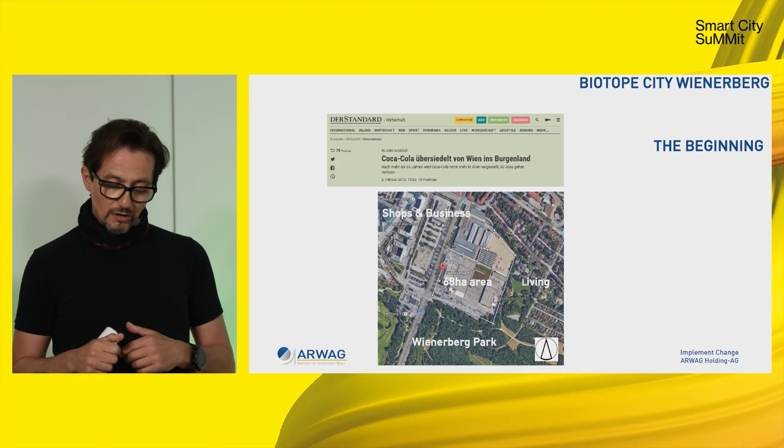The beginning. How did our story begin? It started with an article in an Austrian daily newspaper, The Standard, in February 2012, with the title, Coca-Cola is moving its production from Vienna to Burgenland. That's how the project was initiated. The existing property is fully developed and surrounded by single-family houses, offices and shops and parks.

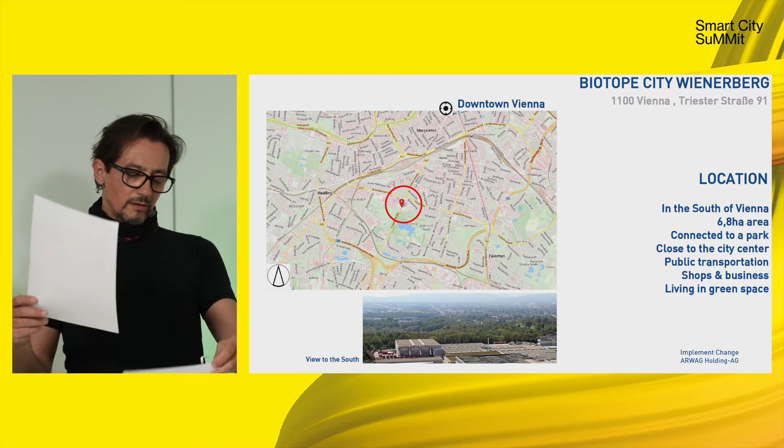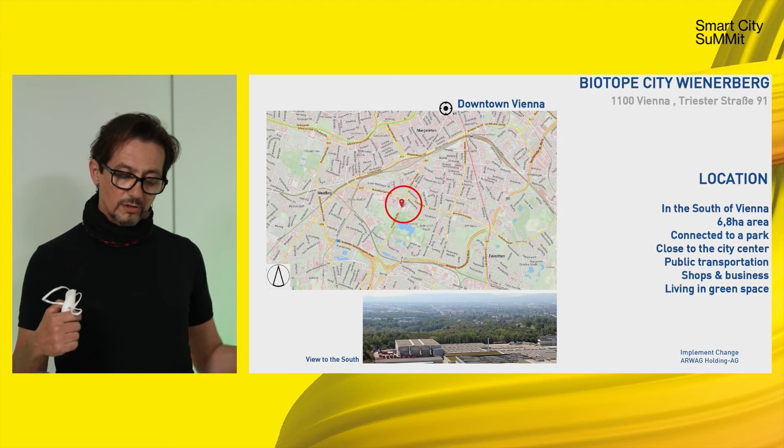The location. We are in the south of Vienna, in the 10th Vienna city district, under Triester Straße number 91. The location is quite densely populated and developed. The public transportation is already easily accessible, and soon a new underground network will further improve the accessibility to the public transportation. You can get to the Vienna State Opera in the city center by bike in only 15 minutes. We are talking here of a distance of 5 kilometers.

Office and shops are located vis-à-vis the location. In the northeast of the property, there is a residential area. The property is adjacent to the Wienerberg Park with a nature-preserved pond in the south and the west of the location.

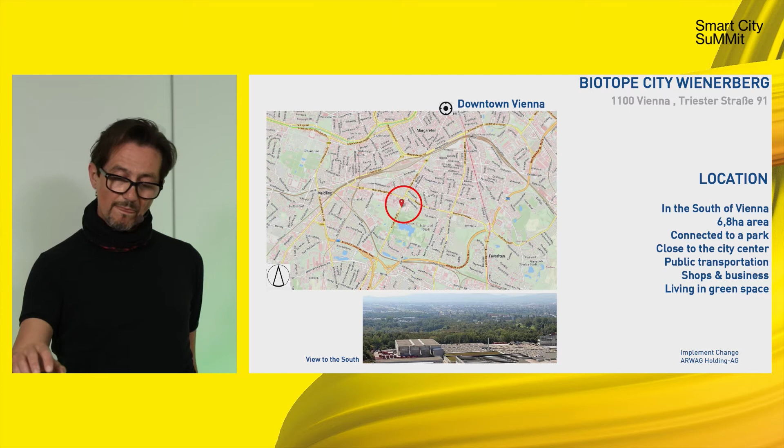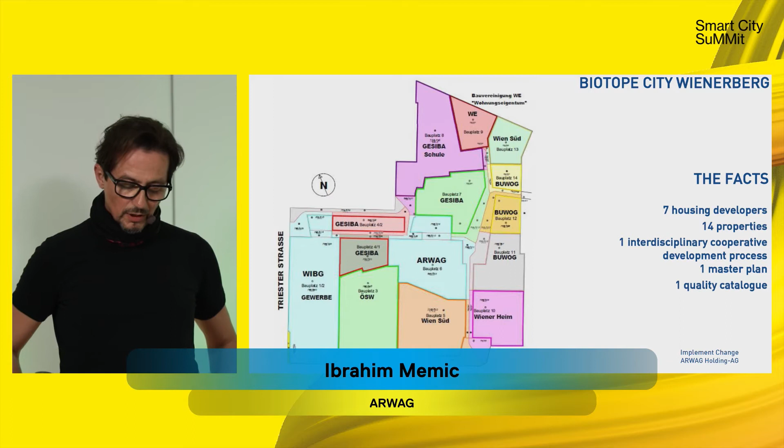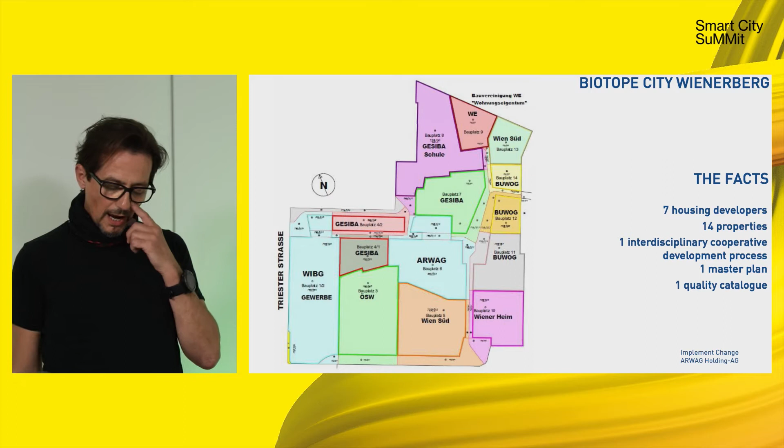The facts. The whole area spreads out over 6.8 hectares. 7 property developers cooperated on this project due to the size of the property. During the development process, the whole area was divided into 14 real estates. An interdisciplinary development process was initiated with the aim to develop a master plan and to define quality standards.

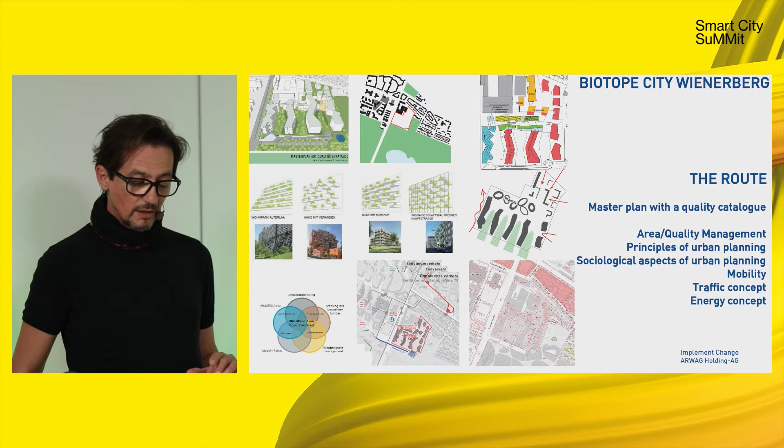The route. With joint forces, we developed a master plan for urban planning which is based on an interdisciplinary and cooperative process of project development. The procedure shows a perfect interaction between architects, developers of public spaces, urban developers, traffic planners, mobility planners, sociologists and energy developers, and focuses on area and quality management, sociological aspects of urban planning, mobility plan, public transportation, energy concept of Biotope City. The results are summed up in a quality catalog.

We didn't define what we do not want. On the contrary, we focused on what we want to achieve, and there are these aspects: living in the green spaces, green parks and connection to the nature, green facades, green rooftops, urban gardening, natural spaces for people and animals, car-free area.

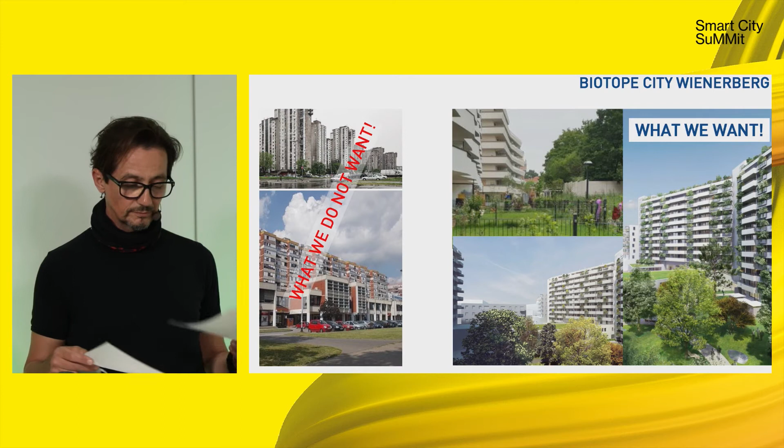What we did. What have we achieved? 1,000 apartments, 16% rental, 40% privately owned, 700 square meter commercial space, 14,000 square meter office, hotels and commercial, 1 school, 2 kindergartens, 1,250 car parking slots,

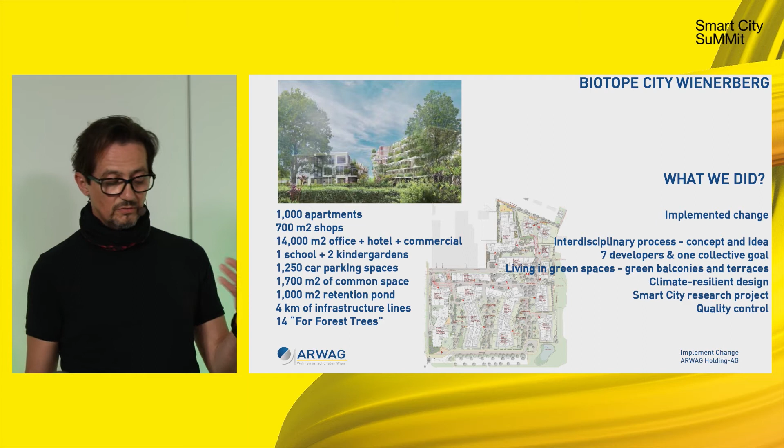1,700 square meter of common space, 1,000 square meter retention pond as a part of rainwater management, and at the same time as living space for versatile species. 4 kilometers of infrastructure lines and 14 forest trees. It's the same with 20 years as mature trees.

How did we achieve it? Let's call it implement changes. Thinking scientifically, environmentally friendly, and protecting the climate instead of improving old. By having a clear concept and ideas, by thinking as an interdisciplinary team, by following the same goal with other participating developers, by providing the green areas as part of the living space for people and the animals, by including climate-resilient design of the house on the landscape based on the scientific models, by behaving scientifically, by applying the traffic light system as a part of supporting quality control during the construction works. By following up on evaluation of the quality standards after moving into the building.

And how to implement change, or how do we apply the changes? Together with property developers who participated in this project, researchers, scientists, engineers, and most important of all, our willingness and knowledge how to improve climatic changes.

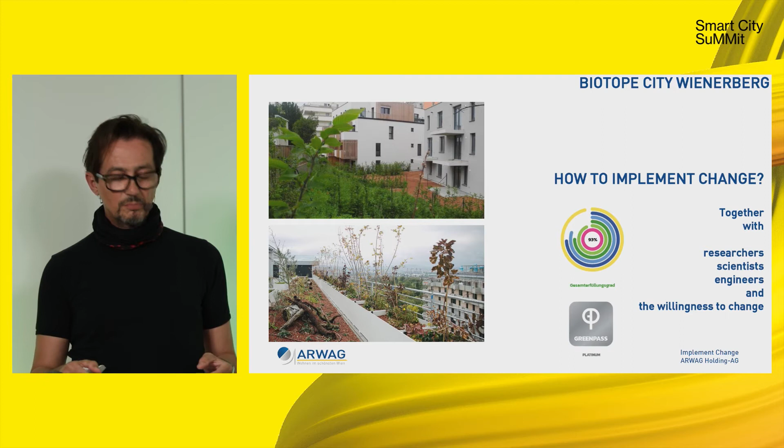Thank you for having the pleasure to introduce you to the Biotope City approach, scientific approach, how we can achieve climate resilient urban quarters, what we really need, and everyone I think is aware of. And we did this with a new tool called GREENPASS, and I will give you some insights on how we implemented that for the Biotope City.

So he initiated the project, found real estate developers that would support the idea, and finally we found the Coca-Cola area in the Triester on the Wienerberg in Vienna. And all started with a cooperative design process, as mentioned by Mr. Memic before, with different approaches how we could develop these 6.8 hectares.

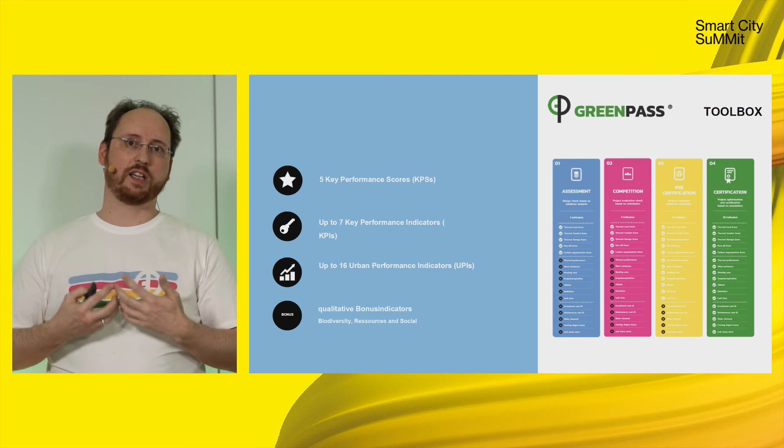And by that, it uses expert simulation tools and extracts and calculates from that 5 key performance scores, 7 key performance indicators, and 16 urban performance indicators from the results from the simulation combined with spatial analysis and some other things. And there are additionally 20 bonus indicators that also award points to a project.

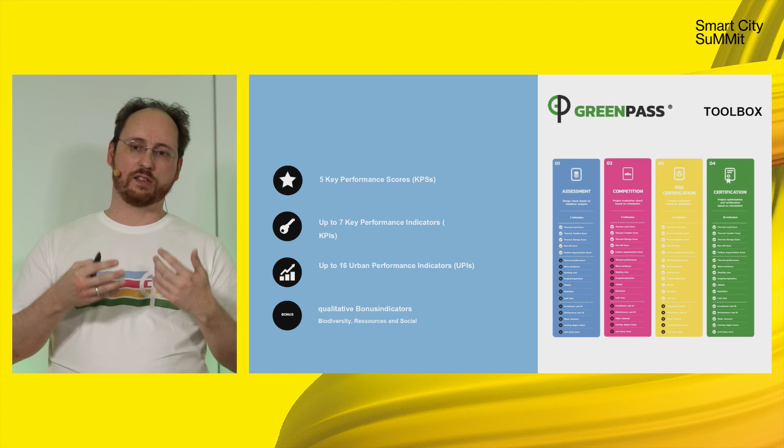The GREENPASS toolbox, that you can see on the right-hand side, is designed to really follow the principles of the development of urban areas from the preliminary design phase to the concept design phase to the detailed design phase, to really guarantee and secure the qualities over that long period of, it was 6 years now.

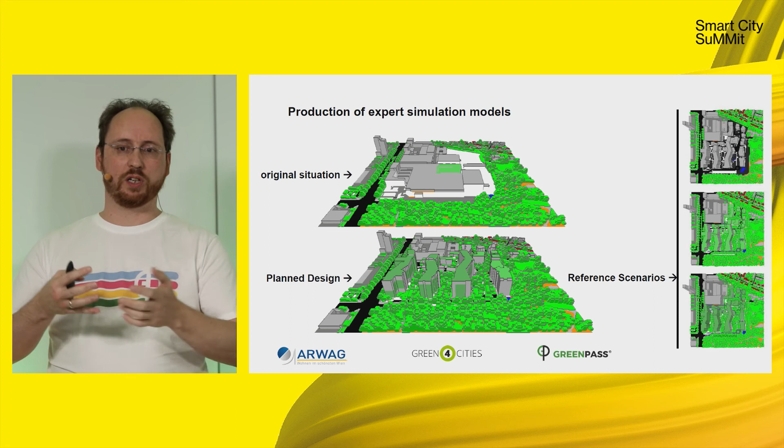Yes, here you can see the area again. Let's skip that. What we did basically is we transformed the architecture into simulation models. On the lower left, you can see the originally planned design. On the top left, the original situation. On the right-hand side, we generate reference scenarios based on the planned design with the worst case, moderate case, and best case scenario.

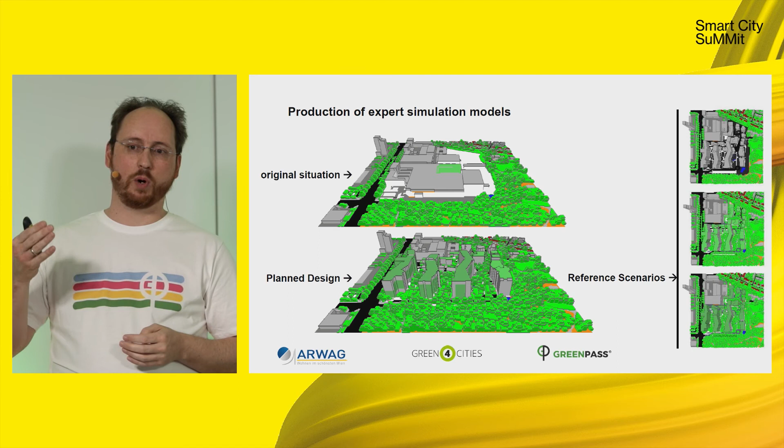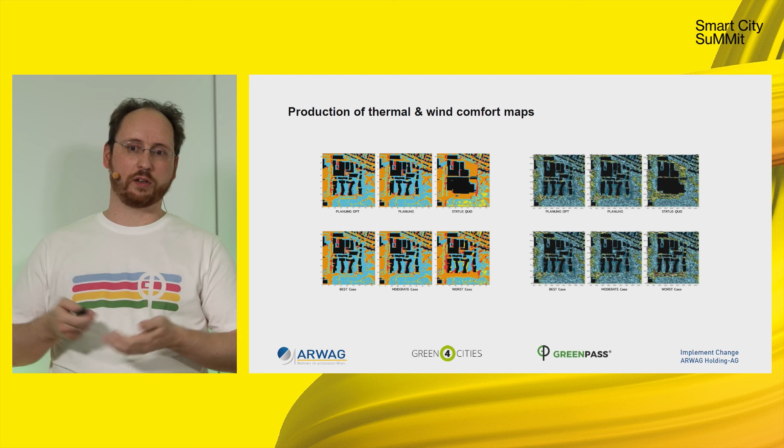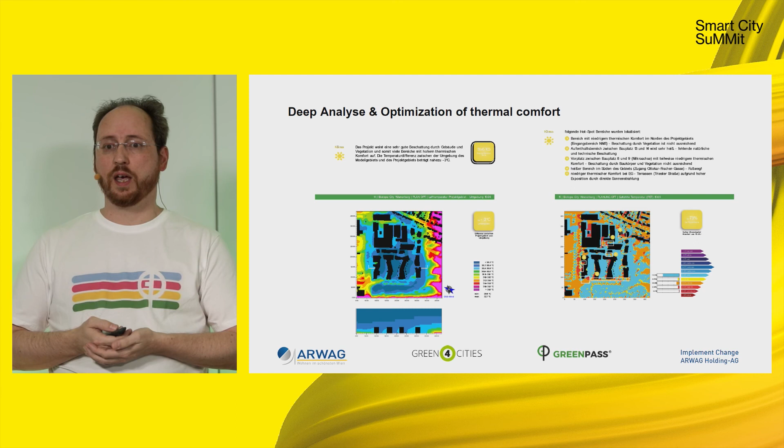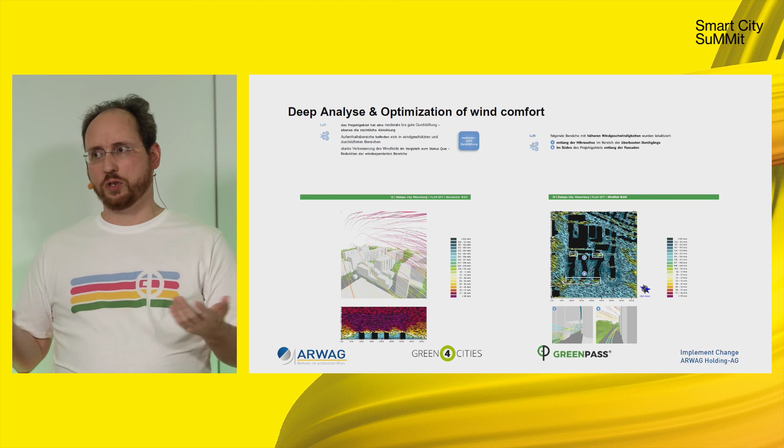What we do with this is not only having nice pictures, but we analyze that and we make suggestions for optimizations. Like you can see on the right-hand side, we analyze the area and we give suggestions how to improve the thermal comfort. We do the same for the wind comfort to avoid gust areas and stuff like this, which are also not really cozy to sit there or to play there.

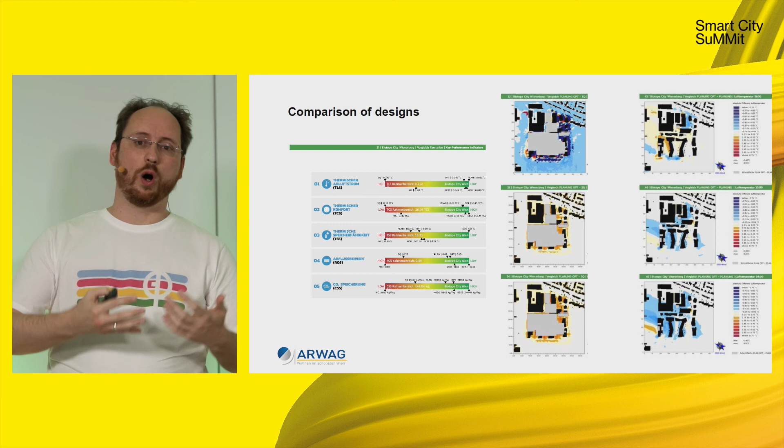And what we can do is we can easily compare different design approaches. You can see our performance bars on the left-hand side and so-called difference maps on the right-hand side, where we can easily compare the different design approaches and visually and in numbers understand which design approach is better or which aspect of a design approach works better than the other. So this is the basis for the optimization process.

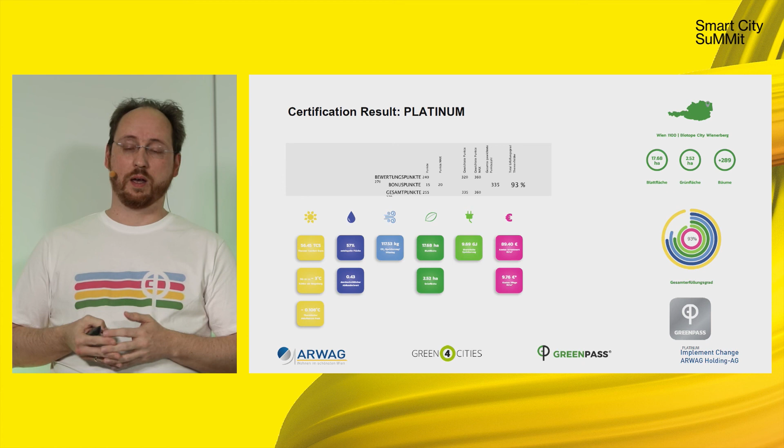We ended up with the optimized design, which reached 93% of fulfillment, which is the new record in the GREENPASS history of 3 years and 90 projects. So it's really a great number here and a great performance, and we're very happy to be allowed to support the project and finally see that the Biotope City is not only words and qualitative measures, but it really works in terms of climate resilience. And we can certify that.

And with these words, I want to close this presentation and I'm looking forward to your questions. And I have a question for you. You might want to ask yourself or think about it in a group: How climate resilient and livable is your project? Thank you.